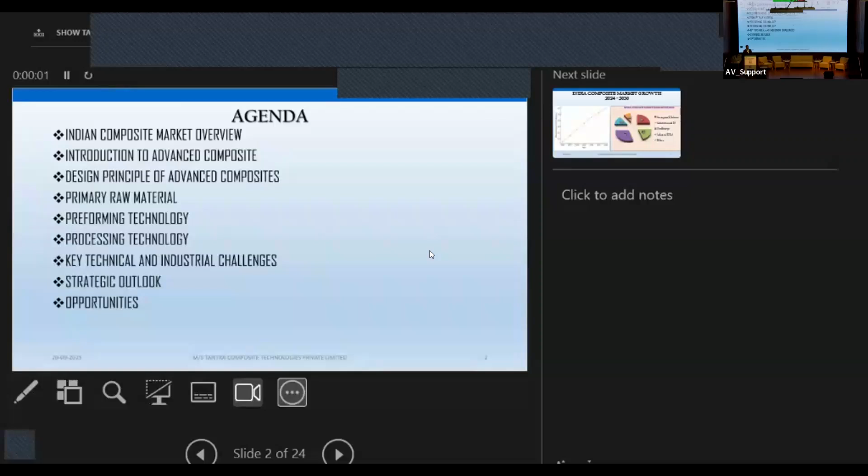I would like to mention that in the last two days of the conference, this being the second day today, many things have come across about composites. People have spoken about almost everything, from manufacturing to recycling. The one thing that has been given the least attention

I will appreciate one of the professors—I think from some university—who yesterday gave a presentation on engineering the interface. This is a very important area where students can do lots of research with various types of resins and various types of reinforcement, because this is the one responsible for transferring properties from the fiber to the matrix, or resin, and that will decide the ultimate mechanical properties of the material based on the intended application. So we'll try to focus on this aspect here.

Though this aspect was initially not what I planned to present, it was not at all included because most of that has already been covered. So I thought it should be something unique. Let's go with that.

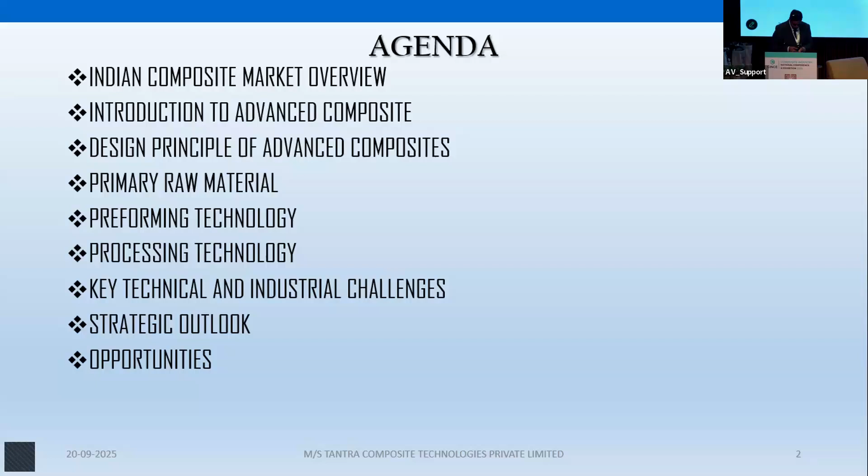Here you can see the growth chart from 2024 to 2030, where the composite market is going to reach around 3.0 billion USD. These are the areas Indian composite industries are looking at: 25% towards aerospace and defense, 20% towards automotive, 30% to wind energy, and 15% to industrial, rail, and others. So these are the percentages acquired sector-wise, as listed here.

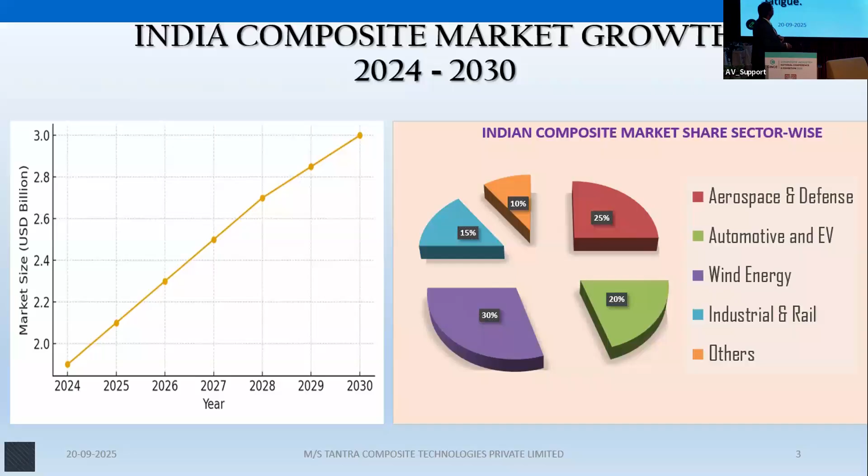So let's go to the advanced composite introduction. Advanced composites are engineered materials that have the ability to replace the primary, secondary, and tertiary load-bearing structural components in an application. That's what actually brought these components into the material domain—to replace primary, secondary, and tertiary load-bearing structures. But the direction has gone to some other side.

Advanced composites are manufactured using pre-engineered and near-net shape continuous fiber preforms made from carbon, glass, aramid, and combinations thereof, in order to achieve economy depending upon the application sector. This preforming is a pre-engineered dry fiber coupled with liquid composite molding (LCM) techniques using thermoset and thermoplastic polymer matrices, offering potential for low cost and mass-produced composites. Advanced composites offer high directional strength-to-stiffness-to-weight ratios, increased energy absorption, enhanced delamination resistance, thermal stability, and fatigue resistance.

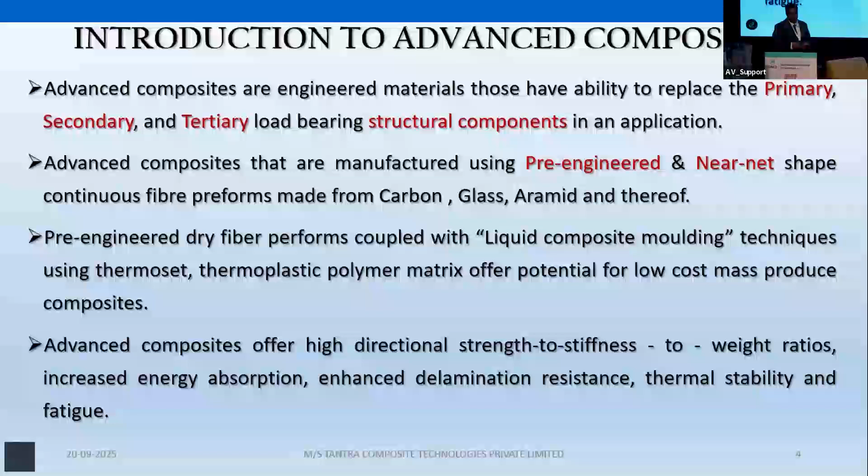This is a very important aspect of designing the composite. Yesterday there was some discussion about if somebody is given a task, from which outlook the person should look at the aspect or the application. So this is the key there.

If a component needs to be made for the aerospace, or any other well known field, the analysis of the environment is very important, because the analysis will provide you the background - what raw material to select, what should be the preforming structure, what should be the resin, and what kind of processing method one is going to use.

Here you can see that the fiber volume fraction is very important for the composites to attain, so that they have the properties for which they are intended.

Here you can see the arrangement of fibers - bidirectional fibers, unidirectional fibers, and how the properties vary with non-woven fabric, unidirectional pre-preg, fabric in 0-90 directions, and quasi-isotropic. So three levels of fiber orientation include random orientation, giving nearly isotropic properties.

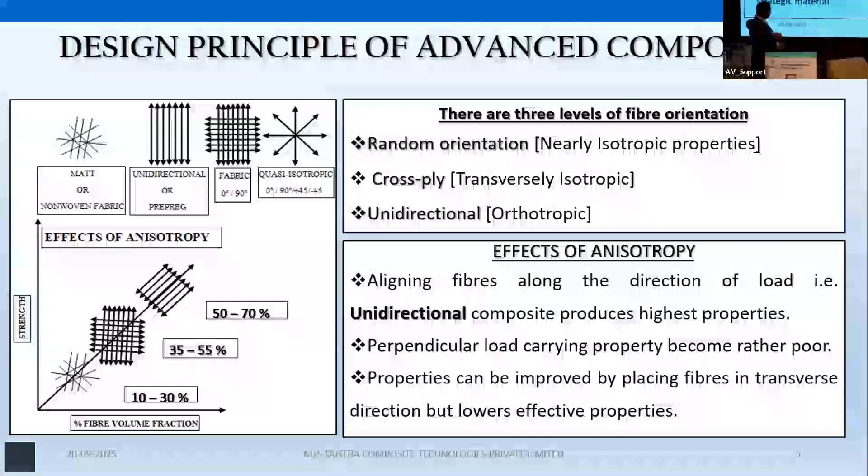These are the various raw materials we're already familiar with - carbon, glass, aramids, basalt fibers, natural fibers, and hybrid reinforcement. Depending upon the requirements, one can have various combinations in this direction and produce materials for a variety of applications. So this is the preforming technology.

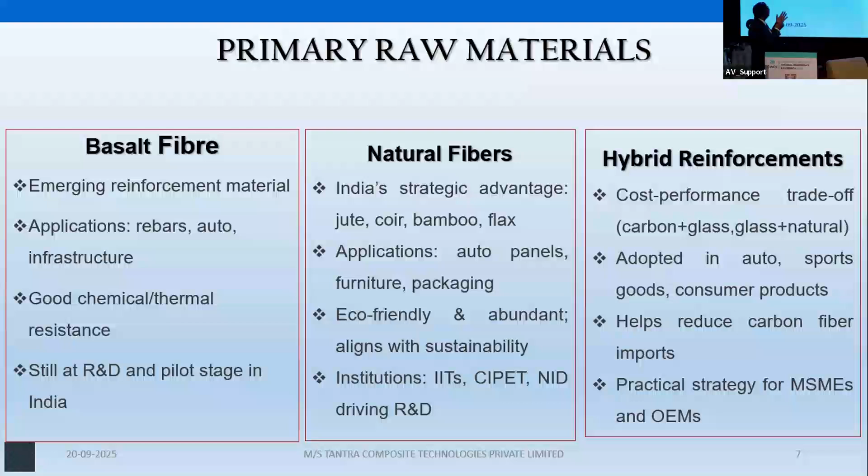Advanced preforming involves shaping reinforcing fibers because the fibers that are available are in the tow form - a single tow form. Now that single tow, how you tackle that, is very important. The application, or the application environment, will give you the idea of what one can do with the fiber.

Into near net shape preforms before resin infusion, ensuring precise fiber placement and optimized mechanical properties. So that is the directionality aspect.

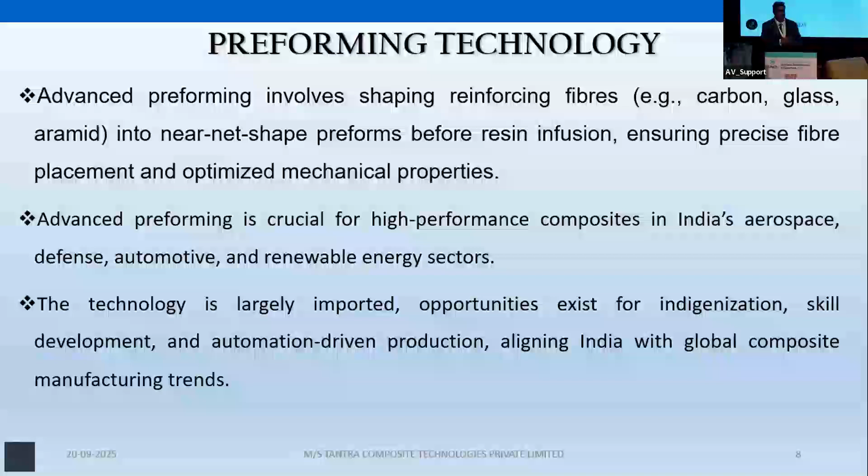Advanced preforming is crucial for high performance composites in India - aerospace, defense, automotive, renewable energy sectors. The technology is largely imported. Opportunity exists for indigenization, skill development, and automation driven production, aligning India with global composite manufacturing trends.

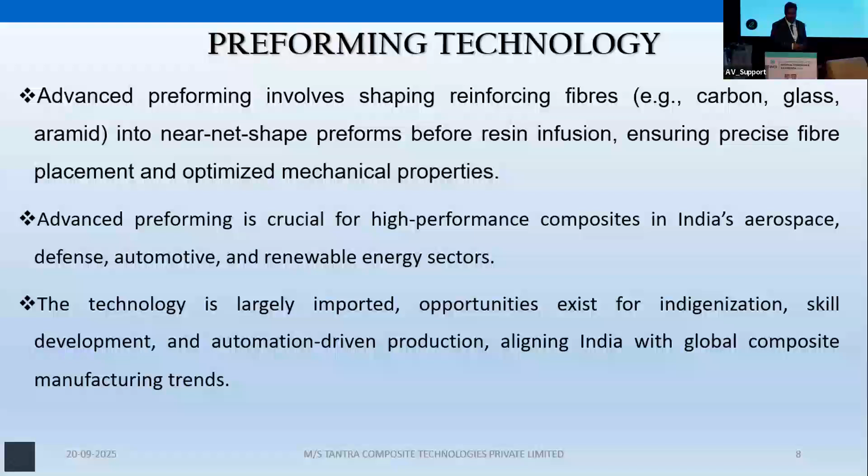So this is the framework of the preforming technology, how the fiber is put into different structures and the technologies that are related to that. Basically the textile technology is one of the fields that has been constantly undermined when composites are seen.

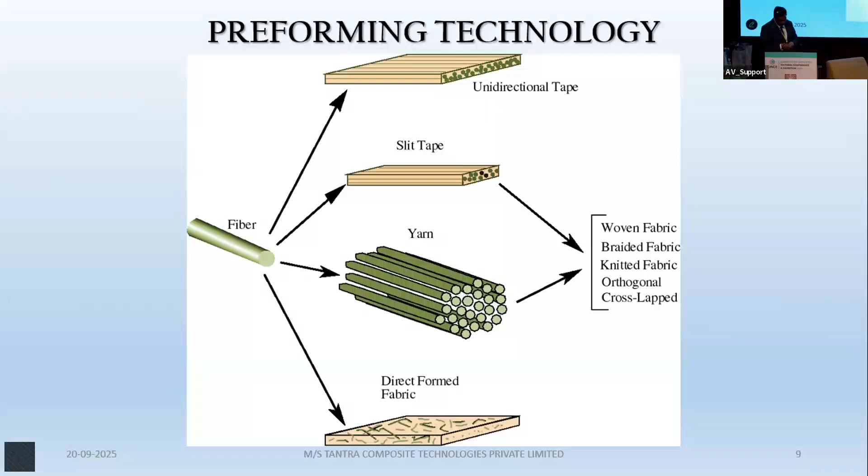These are the various key manufacturing techniques - automated fiber placement, particularly with the industry currently using pre-pregs, automatic fiber placement, automated tape laying, then 2D and 3D weaving technology, robotic dry tow placement, 2D and 3D braiding, along with braid winding and braid weaving.

This is something new that is going to come in the next 5 to 10 years - machines are going to come up in the market, based on the dry tow. These all are based on the dry tow.

Prepregs can be used, but because of the shelf life and other aspects, they are restricted. To cut down the cost - and in an economy like India where we are more conscious about the cost - the dry fiber will be more preferred because it can be stored for longer periods, months, and even up to years after procuring it.

It is not going to be wasted. But for the pre-preg, maximum 2 to 3 months, and this dry fiber does not require any kind of specialty storing processes like refrigeration or other things which the pre-preg demands.

So 2D and 3D knitting technology, inclusive of the warp and weft - these are all the technologies that specifically relate to the 2D and 3D and the robotic dry placement.

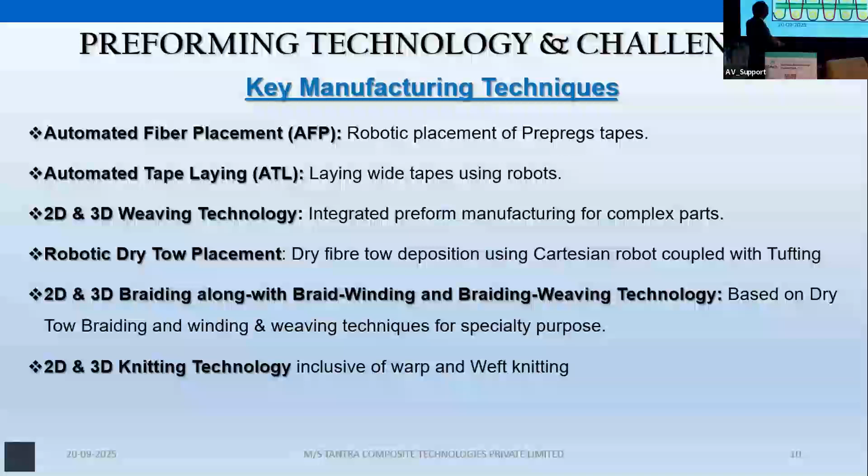So far, we are all familiar with these processes, but they cannot be directly utilized for handling high performance fibers. The reason is these fibers are very delicate, and slight damage to them can significantly cut down the mechanical properties for which they are intended, reducing their advantage, which is mainly the strength property.

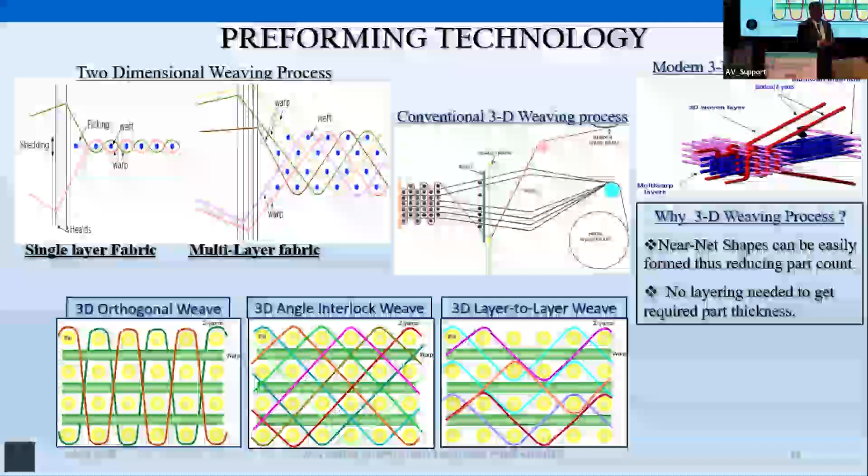That's how 3D weaving technology allows near net shapes to be easily formed, thus reducing part count, which is very important for automotives, particularly where a large number of components or parts are required and then assembled together, also in the aerospace industry.

So 2-3 parts can be combined together and produced in a single process as a near net shape, also taking care of the waste that is generated. With least waste, these technologies work, so no layering is needed to get the required part thickness.

Today what industry is using is single ply woven or satin preforming, which has to be layered to attain the required component thickness. That suffers from very poor delamination resistance and damage tolerance, because there is no through thickness binding.

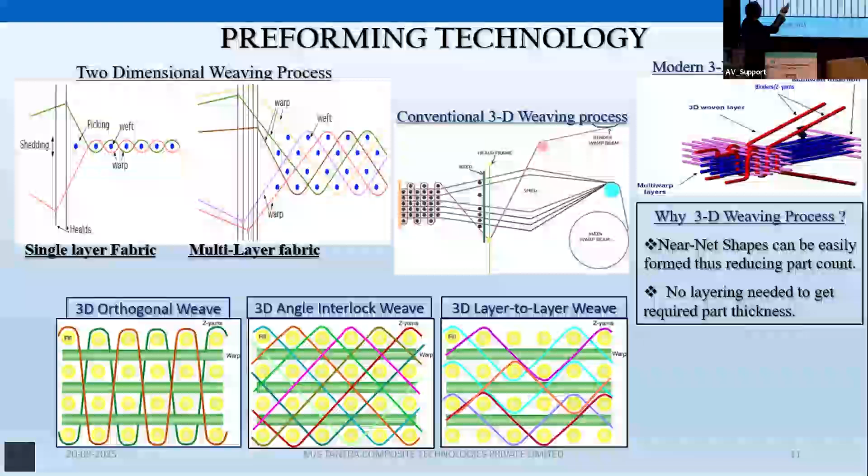With that kind of problem, researchers are pushed towards 3D weaving. The abilities of 3D weaving include providing taper either in the longitudinal direction or in the transverse direction. So the preforming can be fully tailored through the process, and there are no custom built things available here so far.

Many companies like Dornier, which have what is called rigid rapier, particularly claim that they are weaving 3D fabrics, but the ultimate process remains the same, in which a lot of fiber damage is inclusive.

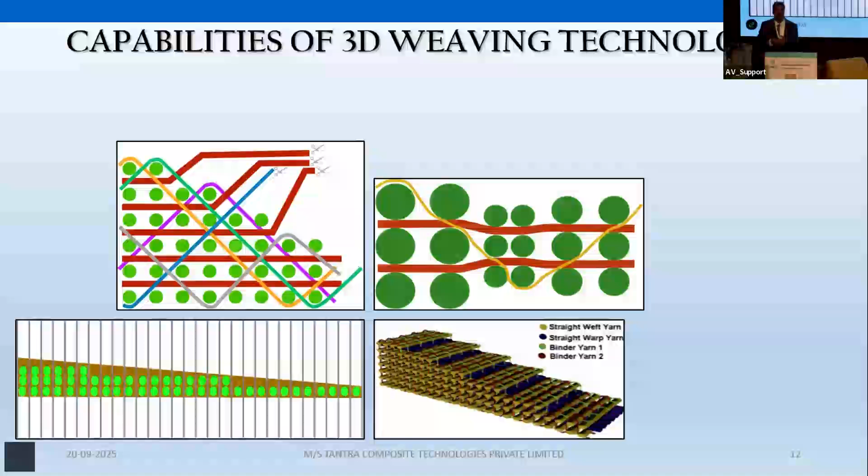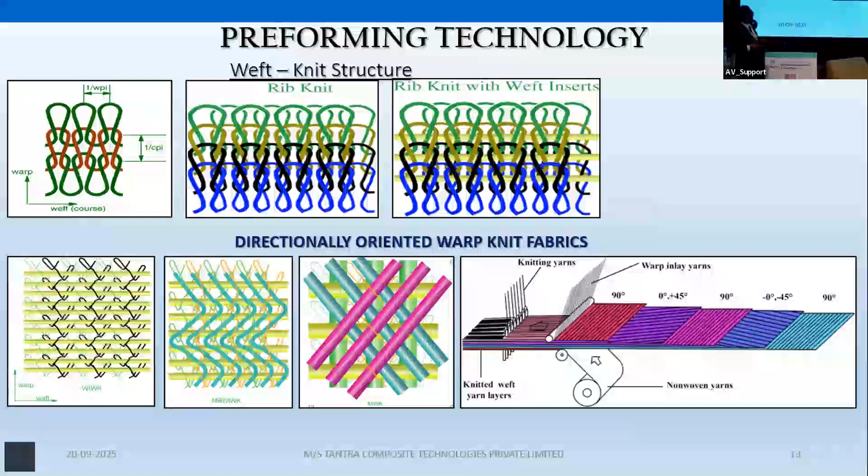Then these are the warp knitting and weft knitting structures. We are all familiar with the directionally oriented warp knits, which we call multi-axial. So far in India, not many companies are manufacturing these. Here also the fibers can be arranged, and especially I would talk about this weft inserted warp knit - it's a specialty for the medical side, where slow drug release materials can be incorporated very easily with the help of this technology.

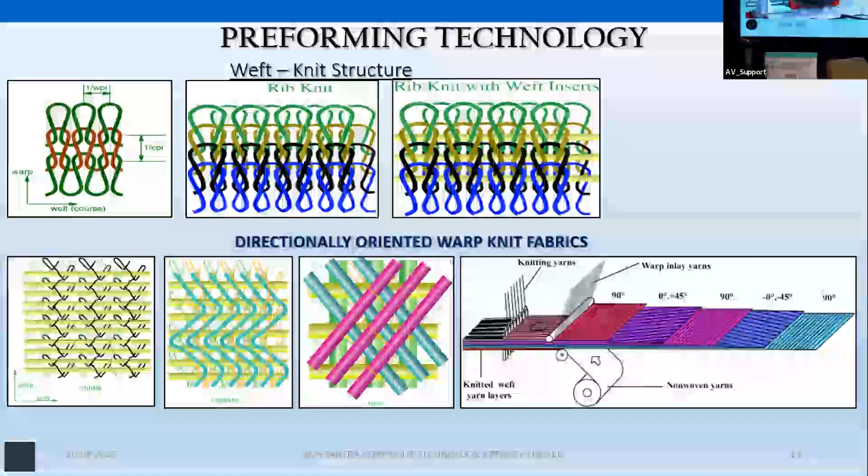Then this braiding - 3D braiding has some applications in aerospace, but because the preforming size is not very large, it's not very popular.

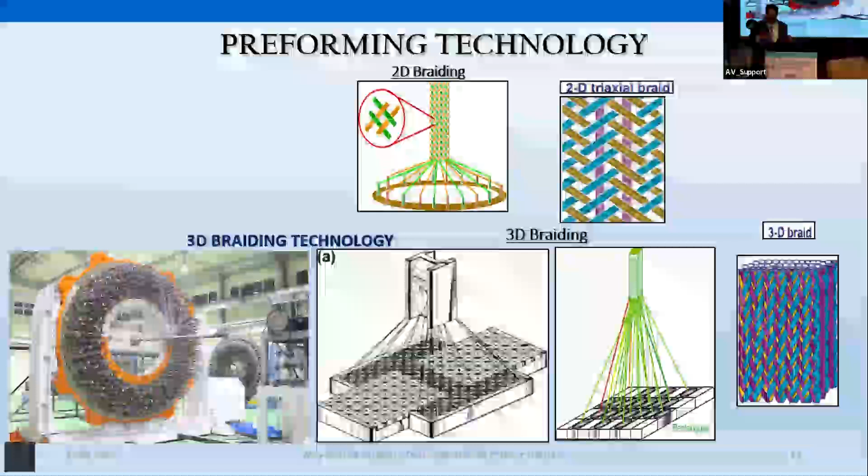Then this is a comparison with LCM, tape laying, and automatic fiber placement, which is coupled with the autoclave. But in robotic dry tow placement, you are free to put the fiber in any direction, at your will. That's why we call it a bespoke technology, where you can engineer the preforming as per the requirement. This can be further coupled with tufting or stitching to provide a through-thickness medium, so that damage tolerance can be taken care of.

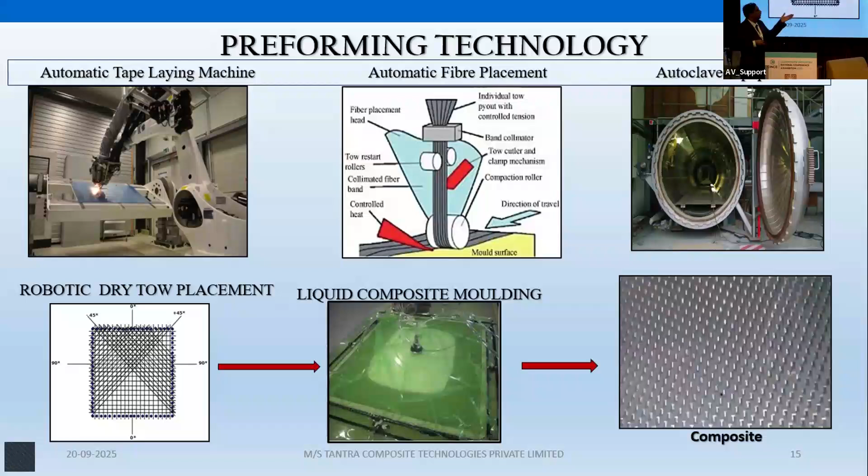So simply the liquid molding - this one involves depositing the fiber onto a grid and then taking that off and converting it into the composite.

This is a simple example - another example. You can see the fibers are placed in different directions. This is a very simple Cartesian robot, very simple compared to what is used in the aerospace industry, the ATL and AFP. This is a much simpler and very low cost technology that can help design composites with utmost strength and proper mechanical properties.

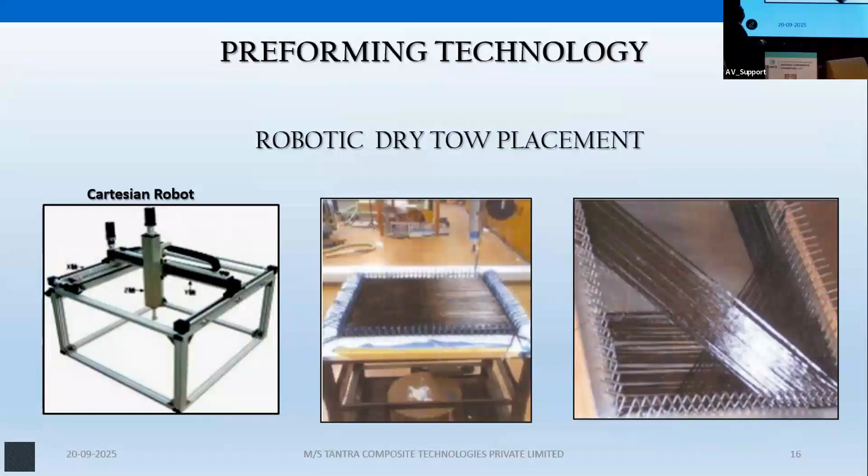So coming to composite processing, composite processing in India has traditionally leaned on autoclave curing for aerospace and defense applications. However, the high capital cost, limited size capacity, and energy intensity of autoclaves create barriers for SMEs and restrict large-scale parts manufacturing. Out of autoclave processing offers low-cost, scalable alternatives that can achieve aerospace-grade quality, cured under vacuum in an oven or infusion conditions.

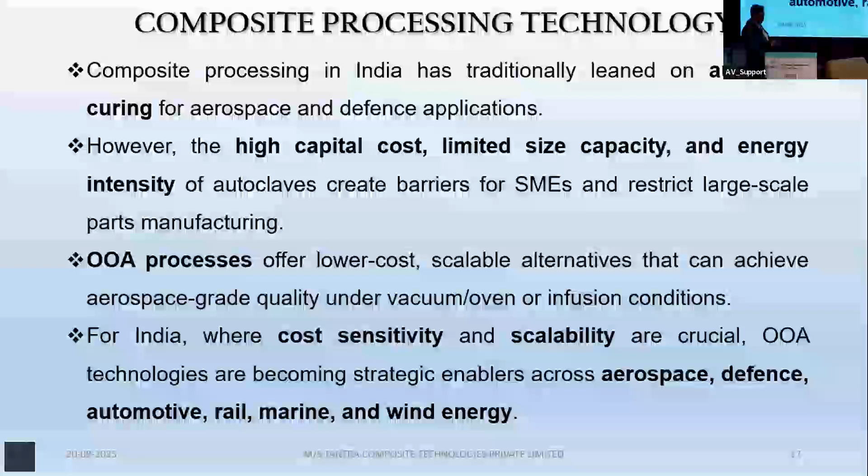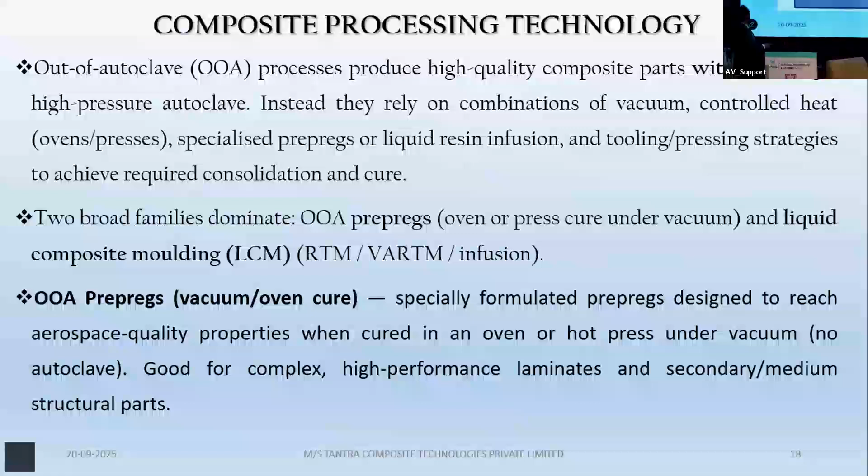For India, where cost sensitivity and scalability are crucial, out of autoclave technologies are becoming strategic enablers across aerospace, defense, automotive, rail, marine, and wind energy. It produces high quality composite parts without using a high pressure autoclave. This is the advantage of this technology. There are two alternatives in that. Prepregs can also be processed out of autoclave. This is the basic setup of the process.

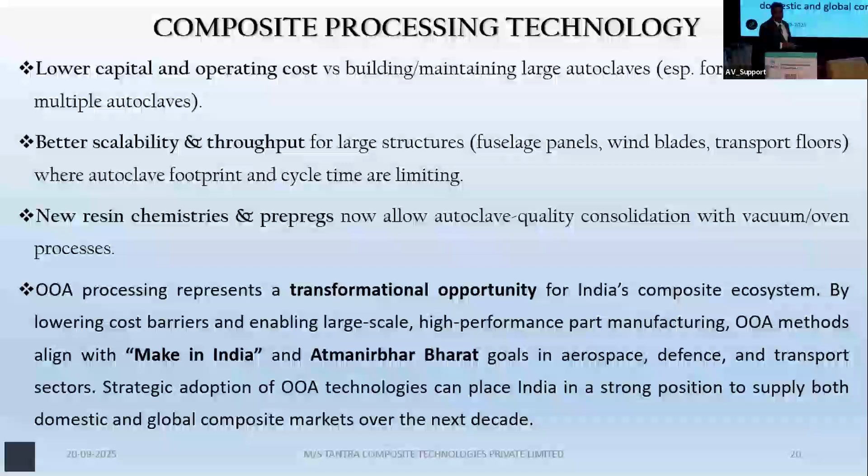So lower capital and operating cost compared with building and maintaining large autoclaves, better scalability and throughput for large structures, and new resin chemistries and prepregs now allow autoclave quality consolidation with the vacuum process. Out of autoclave processing represents a transformative opportunity for the Indian composite ecosystem by lowering cost barriers and enabling large-scale, high-performance part manufacturing. Aligned with the Make in India and Atmanirbhar Bharat goals in aerospace, defense, and transport sectors, strategic adoption of these technologies can place India in a strong position to supply both domestic and global composite markets over the next decade.

The key challenges the composite industry in India is facing are porosity, void control, and reproducibility. LCM and oven cures are more sensitive to tooling and vacuum integrity; resin flows, cure kinetics, process control, and NDT are essential for that. So lots of work is to be done in this direction so that property assessment can be done to the finest level. Aerospace qualification: whether the composite that is made is qualified for aerospace or not also needs to be certified. Certification is required for that.

So far, it's my perception, and it may not be correct, we still have not attained the level where we can export to some countries. In materials and resin chemistry, lots of work needs to be done, particularly in low viscosity resins, so that the wettability of the preform can be ensured, dry regions within thick preforms can be avoided, and a good interface can be built. Tooling and fixtures: accurate, repeatable tooling and vacuum bagging infrastructure is needed. That needs to be established. The industry is looking ahead, and maybe in the coming few years, things may come up.

Workforce skills are also one important aspect. One thing I would like to say is that composite is a material where if your approach is not first time right, you cannot succeed. Because once the polymer is put into the reinforcement, that's the end. If it is not done properly, and not properly investigated before, then your preform is gone, your resin is gone, everything goes to waste, and you cannot recover it.

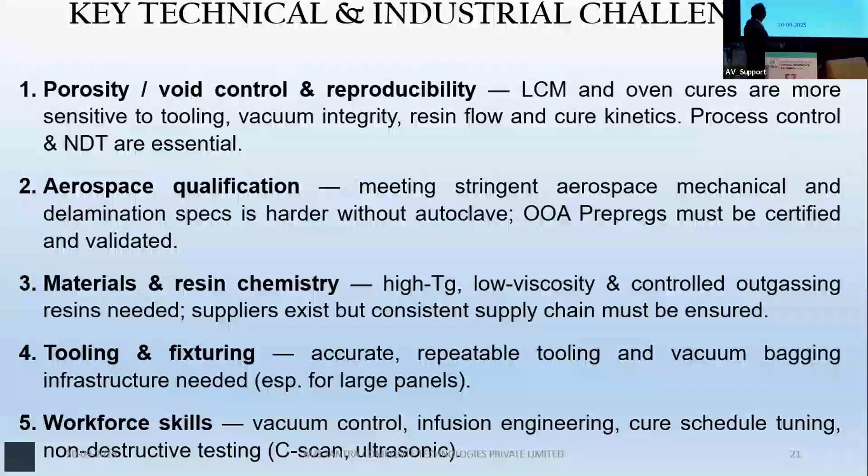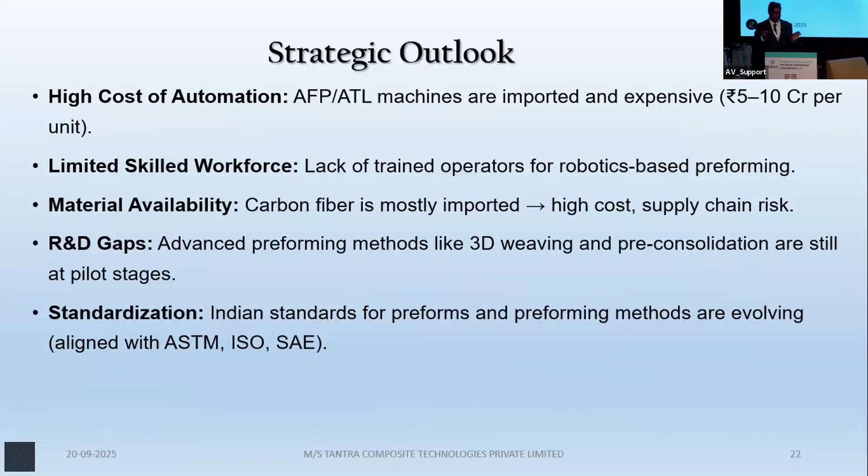The high cost of automation with AFP and ATL, limited skilled workforce, material availability, R&D gaps, and standardization. Particularly, I'll talk about BIS. Still, yeah, just 1 minute, sir. Still, BIS has not done enough in standard development for composites. We are working on that, and soon we will be coming out with it.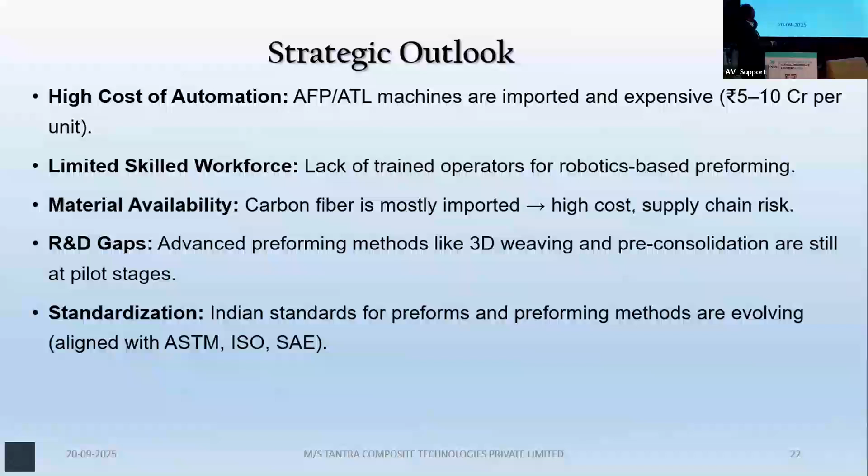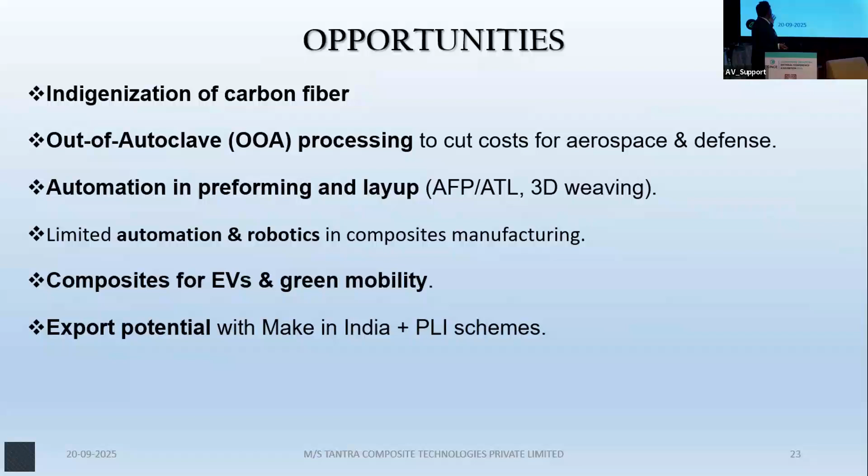On the indigenization of carbon fiber, we don't have any carbon fiber manufacturing facilities. That also goes with government policy and pushing the private sector along with it. Some industries are working on that, and in coming years we can see carbon fiber indigenized. Automation in preforming, and limited automation in robotics; the robotics industry is also not well touched. As I said, this is the cheapest method to produce engineered composites. Then composites for EVs and green mobility, and export potential with Make in India and PLI schemes. Thanks.